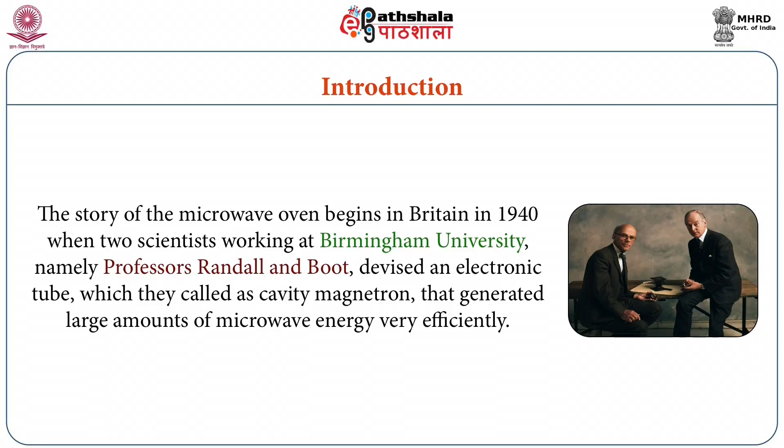The unique ability of the magnetron to transmit microwaves at very high power enabled radar equipment to be built that was much smaller, more powerful, and more accurate than anything previously designed.

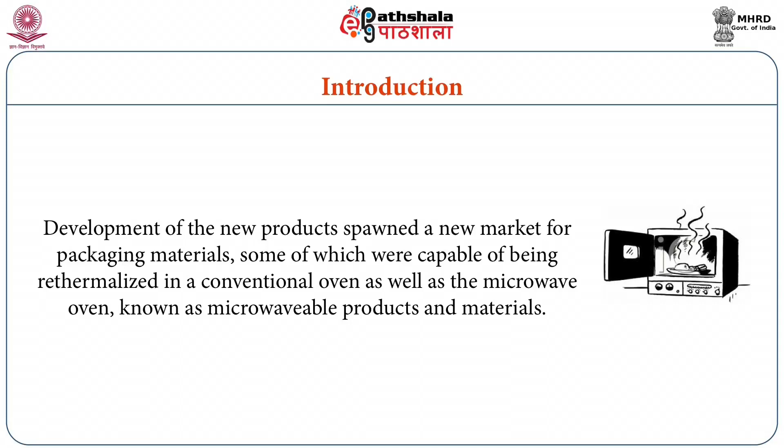In the decade of 1980, there was prolific growth of the consumer microwave oven, resulting in a new category of food products. Development of these new products spawned a new market for packaging materials, some of which were capable of being rethermalized in a conventional oven as well as the microwave oven, known as microwavable products and materials. Still other new products and their packages evolved that were developed strictly for heating in the microwave oven.

The penetration of microwave ovens into US homes and lifestyle grew rapidly, from a mere 15% of households owning a microwave oven in 1980 to an impressive 78% by 1989.

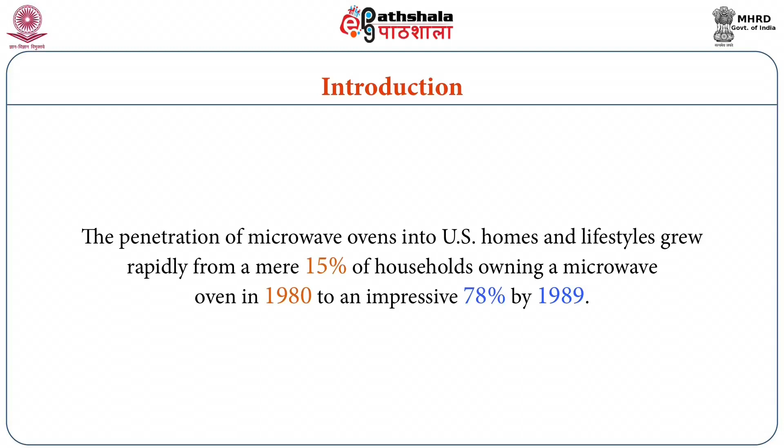The new category was supported by microwave popcorn, a product developed specifically for preparation in the microwave oven. The standard was now set for other new food products attempting to cater to consumers' desires for foods offering quickness and convenience in preparation.

In the mid 1980s, a wave of premium priced frozen dinners was witnessed, positioned as a higher quality TV dinner, now available on thermoset polyester plates capable of being heated in the conventional oven environment or the microwave.

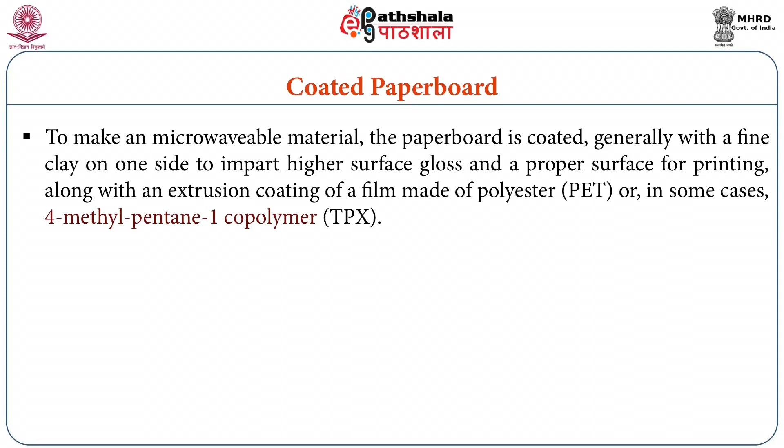To make a microwavable packaging material, the paperboard is generally coated with a fine clay on one side to impart higher surface gloss and a proper surface for printing, along with an extrusion coating of a film made of polyester, or in some cases methylpentene-1 polymer, also called TPX.

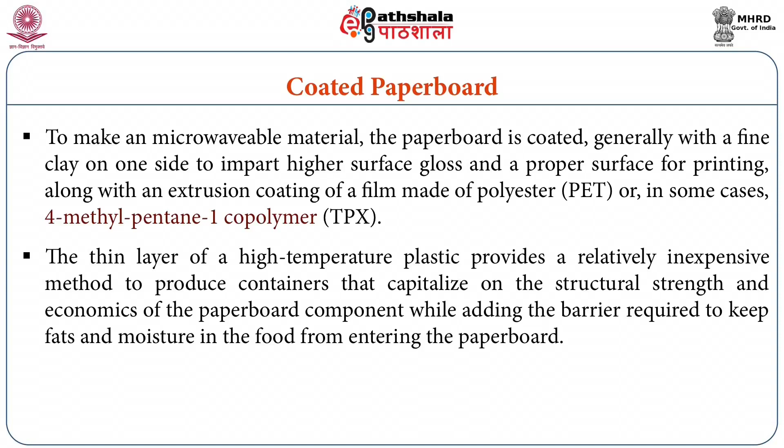This thin layer of high temperature plastic provides a relatively inexpensive method to produce containers that capitalize on the structural strength and economy of the paperboard component, while adding the barrier required to keep fats and moisture in the food from entering the paperboard.

Other plastics are also extrusion coated onto paperboard, notably low density polyethylene and polypropylene. However, the maximum temperature resistance of LDPE is 215 degrees Fahrenheit, and of polypropylene is 260 degrees Fahrenheit.

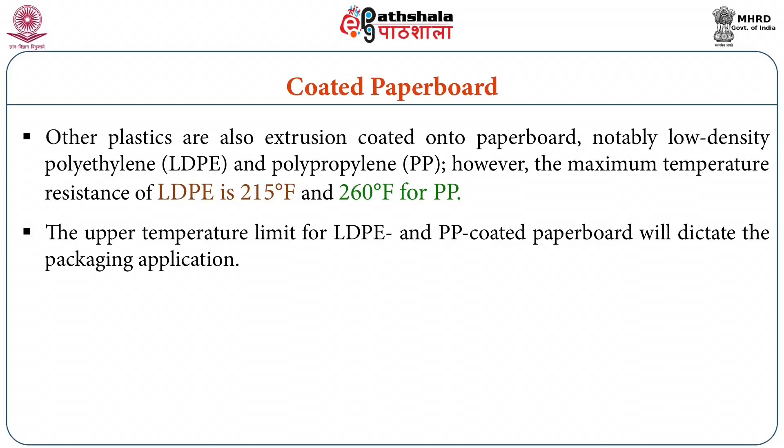The upper temperature limit for LDPE and PP coated paperboard will dictate the packaging application, with a maximum temperature limit of 215 degrees Fahrenheit for LDPE coated paperboard, which provides excellent properties for milk cartons and cold and hot drink cups. However, its use in the microwave oven will be limited to products that will not get hot, such as frozen desserts that may be microwaved only to soften the contents.

Similarly, PP coated paperboard is available for microwave-only packages in which there is no risk that hot spots within the package can reach a temperature where the PP softens, causing structural changes in the package, or the PP to break down, allowing some of its constituents to enter the food.

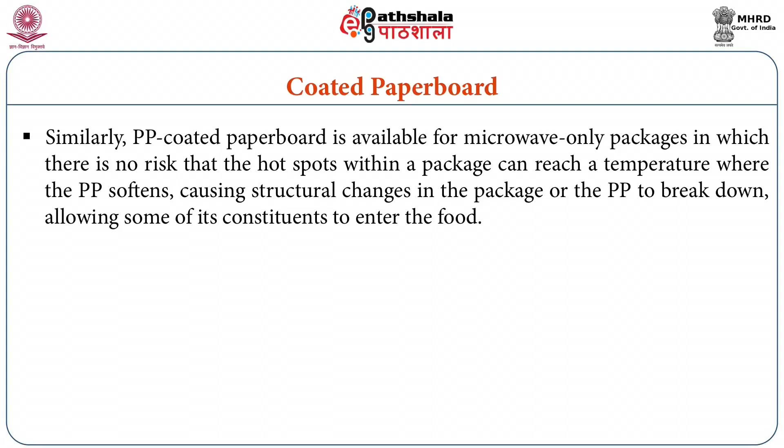The dominant ovenable paperboard is PET extrusion coated. With a maximum temperature use of 400 degrees Fahrenheit, PET coated paperboard is well suited for forming containers used in microwavable packaging for a variety of food products.

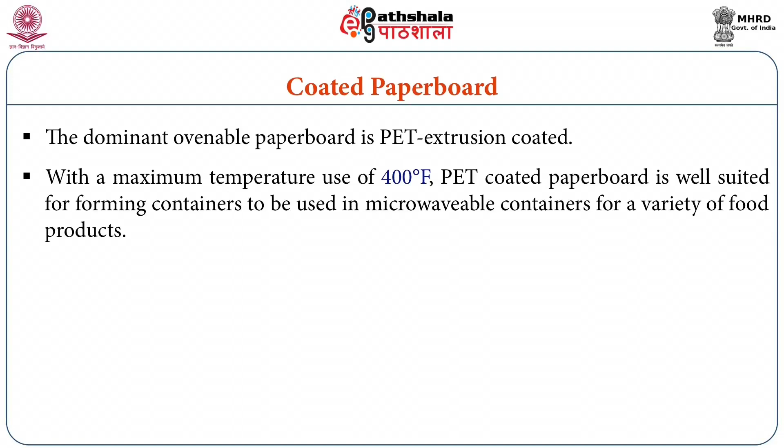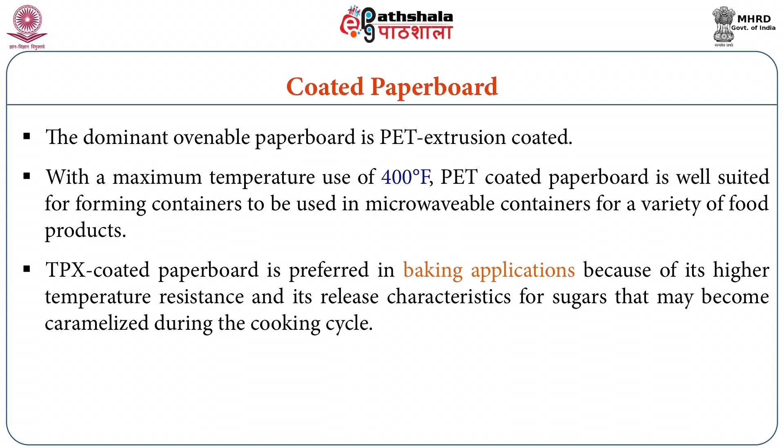TPX coated paperboard is also preferred in baking applications because of its higher temperature resistance and its release characteristics for sugars that may become caramelized during the cooking cycle. TPX coated paperboard is more expensive than PET coated paperboard.

PET film laminated molded pulp trays are cellulose based containers, most commonly seen as plates and trays. The PET film is required to provide barrier resistance to fats and oils, along with the structural characteristics of the lower cost pulp.

The cellulose fibers are suspended in a slurry, which may contain other components such as sizing and treatment to provide better barrier properties, and pumped to the compression molds which form the pulp into the desired container shape.

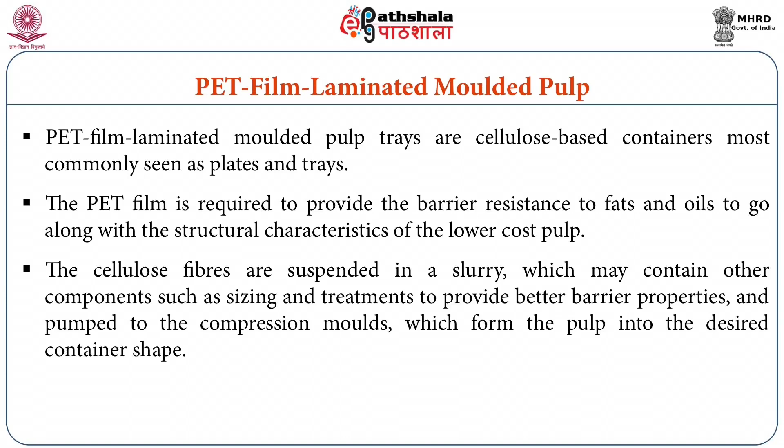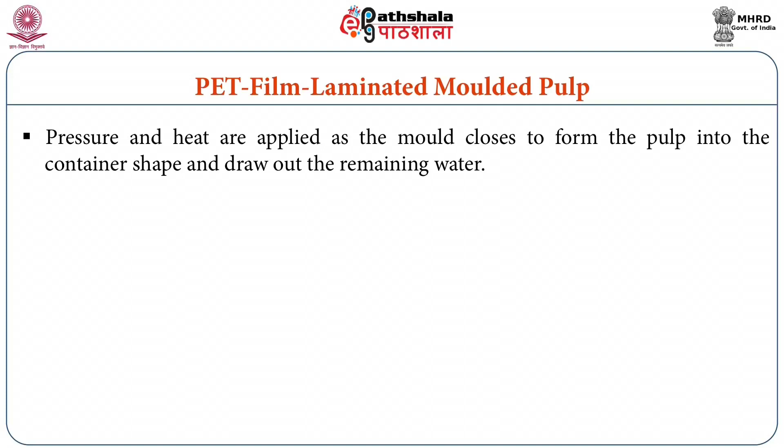The slurry is held into the mold by vacuum, which also draws most of the water out through a screen. Pressure and heat are applied as the mold closes to form the pulp into the container shape and draw out the remaining water. An advantage to this type of molding is the flexibility in the shape of the finished container, which may include divided compartments and areas with varying dimensional thickness for strength.

After the molding cycle, the containers are laminated with a cast PET film, which is then trimmed of any excess and packaged. PET laminated molded pulp trays will withstand oven temperatures of 400 degrees Fahrenheit with good stiffness and structural characteristics. CPET, or crystallized polyethylene terephthalate.

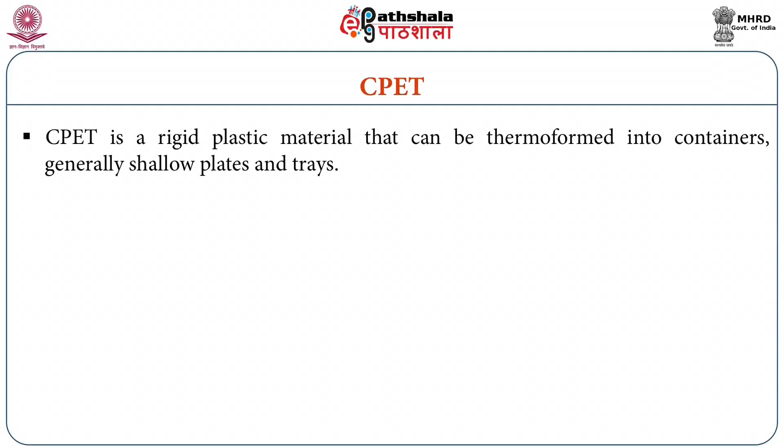It is a rigid plastic material that can be thermoformed into containers, generally shallow plates and trays. To become microwavable, the PET must be crystallized during the thermoforming process. PET contains nucleating agents that assist in the molecular crystallization.

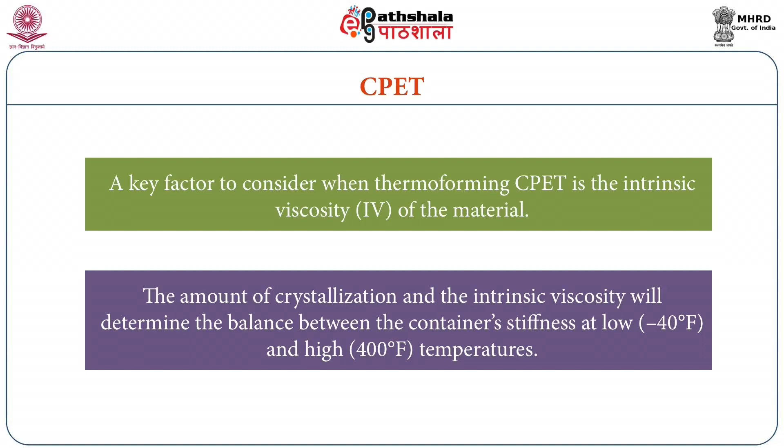A key factor to consider when thermoforming CPET is the intrinsic viscosity of the material. The amount of crystallization and the intrinsic viscosity will determine the balance between the container stiffness at low and high temperatures. Generally, the crystallinity of the finished container will be 28 to 32%, and the intrinsic viscosity will range from 0.8 to 0.95.

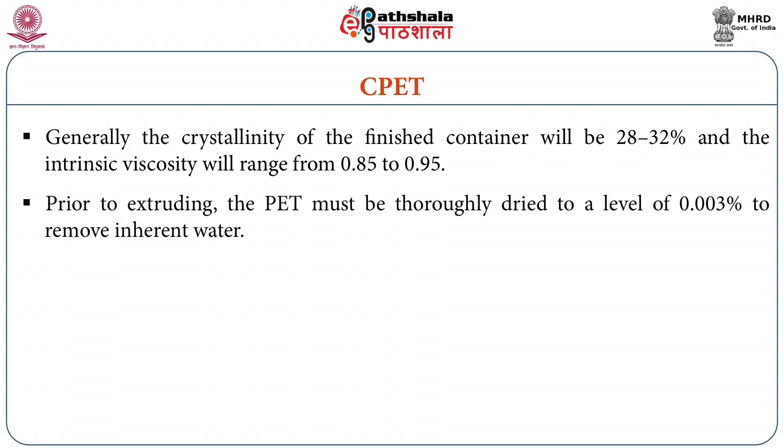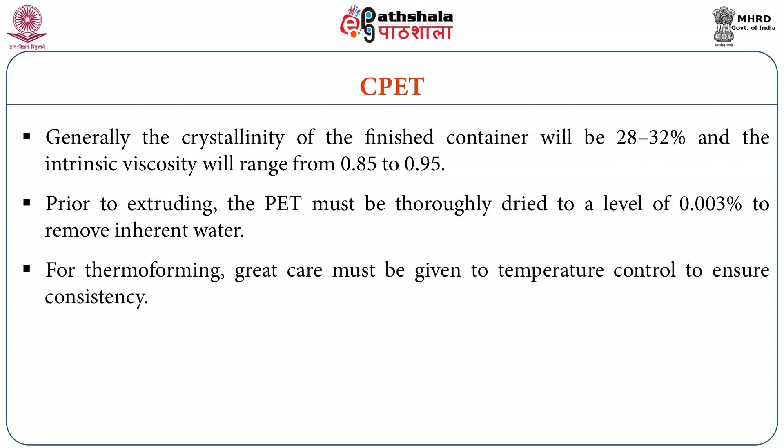Prior to extruding, PET must be thoroughly dried to a level of 0.003% to remove inherent water. For thermoforming, great care must be given to temperature control to ensure consistency. The ovens used to heat the sheet on the thermoformer prior to forming must heat the sheet evenly across the dimensions.

CPET is considered to be a difficult material to work with because of its toughness and narrow range of operating temperatures, so proper mold design is a consideration. Generally, aluminum molds are used to promote even thermal conductivity during forming.

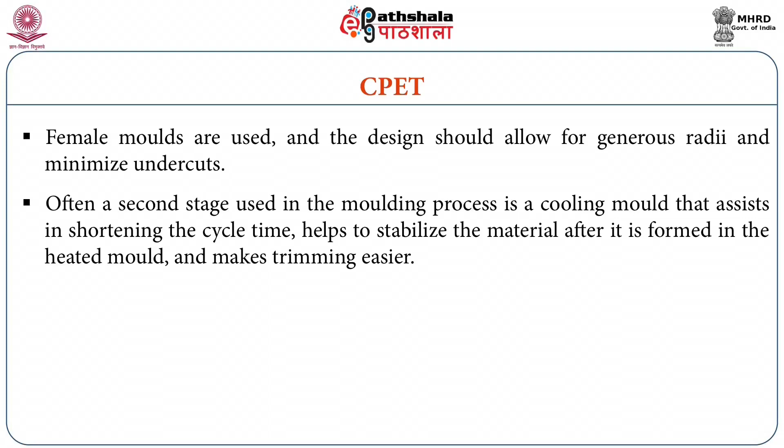Often a second stage is used in the molding process, a cooling mold that assists in shortening the cycle time, which helps to stabilize the material after it is formed in the heated mold and makes trimming easier.

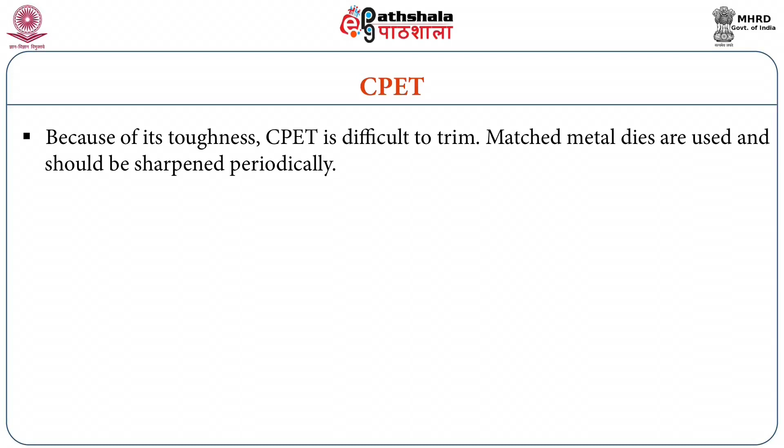Because of its toughness, CPET is difficult to trim. Matched metal dies are used and should be sharpened periodically. Additionally, heavy duty trim presses with quick cycle times should be used.

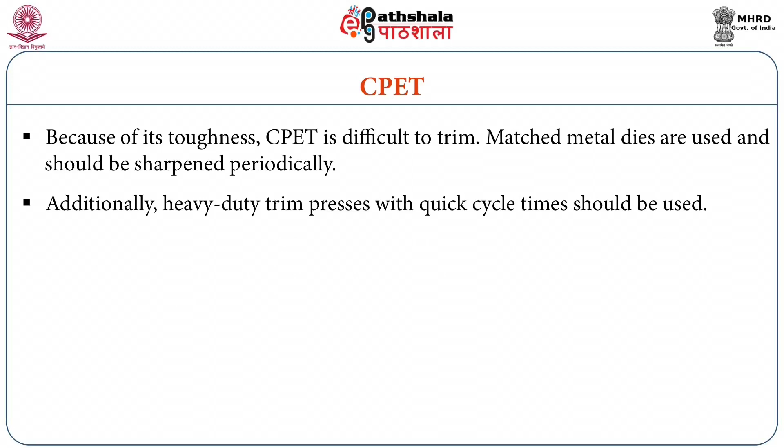CPET has a temperature resistance of 400 degrees Fahrenheit, also has a high gloss, has a hard surface, and can be colored with pigment effectively, although the preferred colors in the market are black, white, and ivory.

PCTA, polymer of cyclohexane dimethanol and terephthalic acid. PCTA is another material in the polyester family that has higher temperature resistance properties than CPET and is a copolyester resin composed of PCTA, which is often referred to by Eastman company's trade name Thermx.

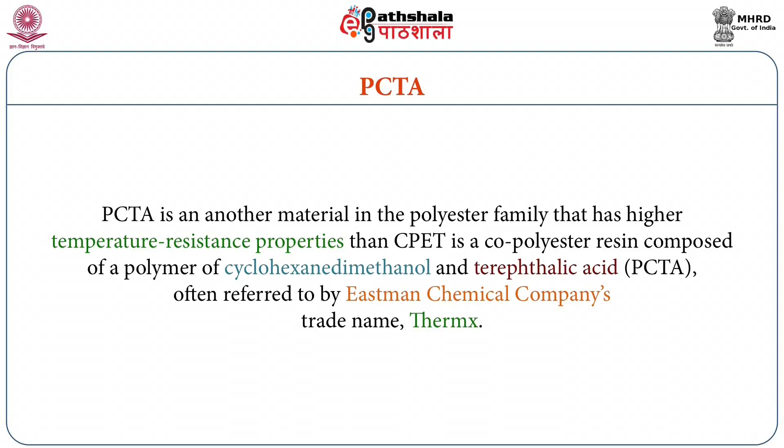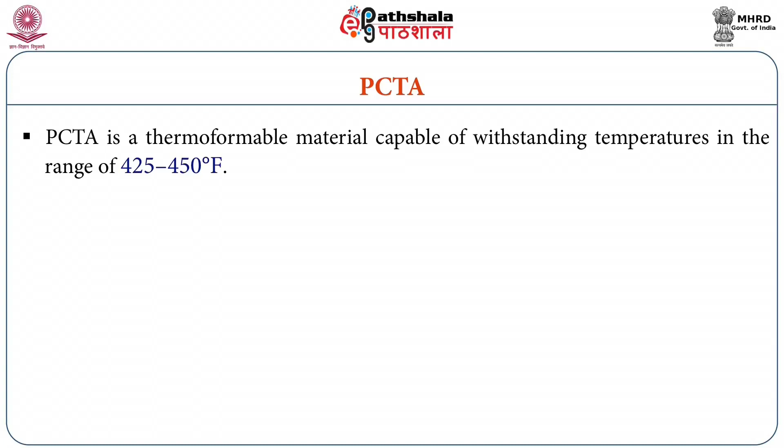PCTA is a thermoformable material capable of withstanding a temperature range between 425 to 450 degrees Fahrenheit, and processing is generally considered to be more difficult than CPET because of the higher temperatures required for extrusion and thermoforming and greater cooling requirements.

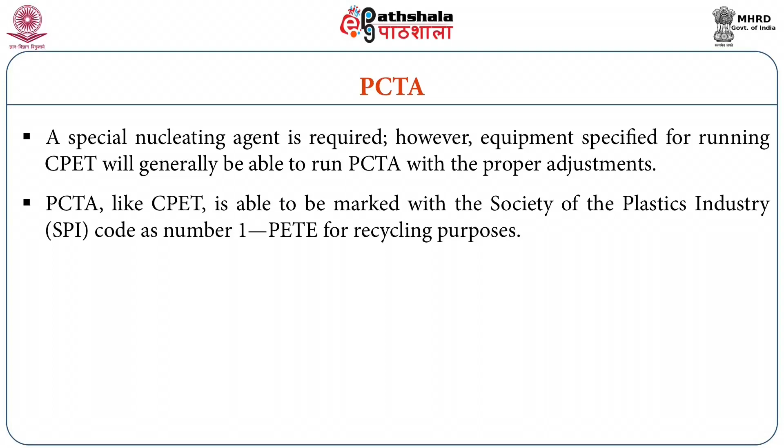A special nucleating agent is required. However, equipment specified for running CPET will generally be able to run PCTA with the proper adjustments. PCTA, like CPET, is able to be marked with the Society of the Plastics Industry code as number 1 PETE for recycling purposes. Formed CPET.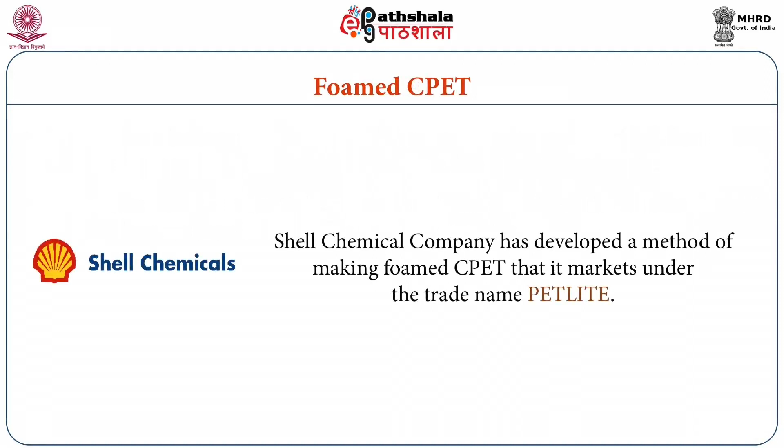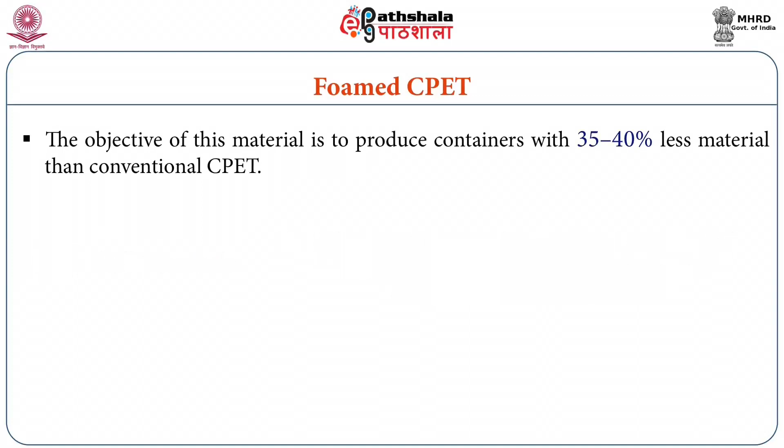Shell Chemical Company has developed a method of making foamed CPET that it markets under the trade name PETLite. The objective of this material is to produce containers with 35 to 40% less material than conventional CPET.

Extrusion equipment used for CPET must be modified for running foamed CPET. However, a single screw extruder can also be used. The blowing agent used for the expansion is an inert gas.

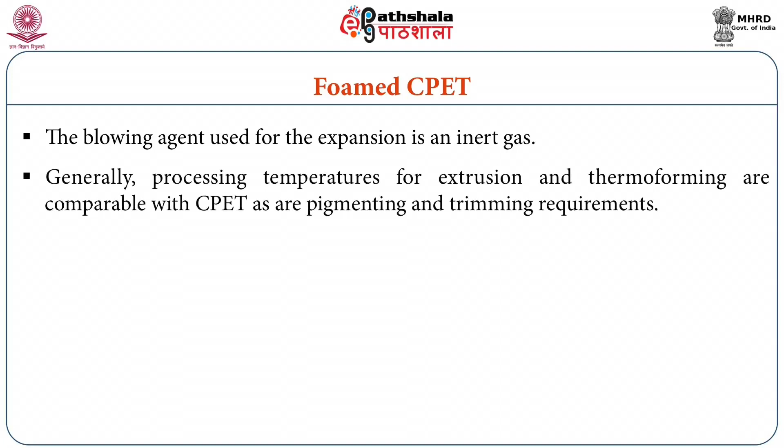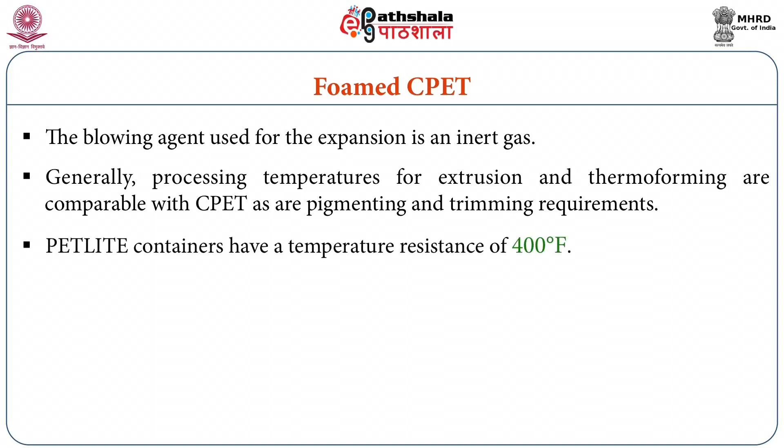Generally, processing temperatures for extrusion and thermoforming are comparable with CPET, as are pigmenting and trimming requirements. PETLite containers have a temperature resistance of 400 degrees Fahrenheit, and currently commercial applications include containers for baked goods such as muffins and cakes. Thermoset polyester.

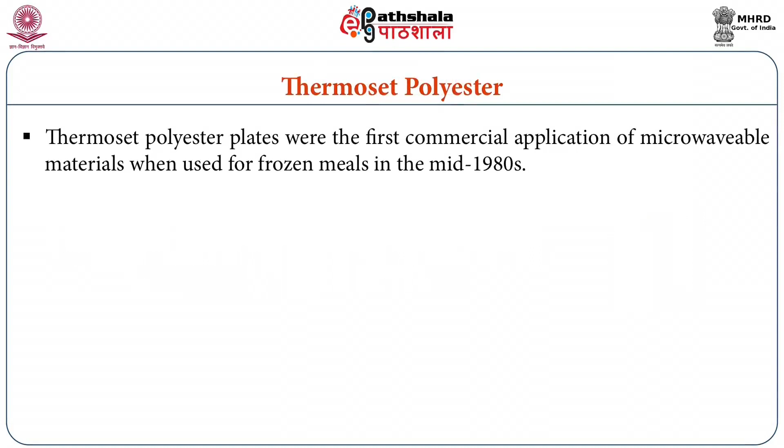Thermoset polyester plates were the first commercial application of microwavable materials, used for frozen meals in the mid 1980s. The compound used is an unsaturated polyester highly filled with minerals such as talc and calcium carbonate, along with glass fibers and catalyst materials to produce the chemical reaction that converts the compound into an irreversibly set material. The polyester compound is mixed and extruded to form logs that are cut to the proper size and weight for the finished container.

The material is placed into a heated mold in a hydraulic press that closes the mold. The pressure causes the material to flow into the shape of the mold, and the heat cures the compound while under pressure into the finished and irreversible material.

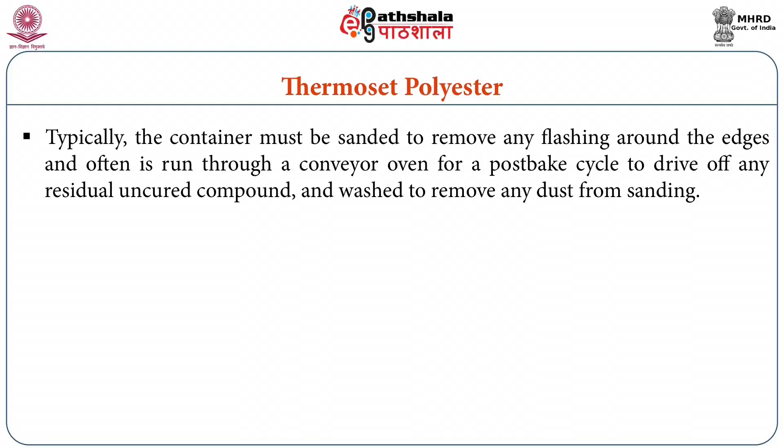Typically, the container must be sanded to remove any flashing around the edges, and is often run through a conveyor oven for a post-bake cycle to drive off any residual uncured compound, then washed to remove dust from sanding. The process produces containers that are very strong and stiff even at high temperatures of 425 Fahrenheit, and are heavy with a china-like feel and appearance.

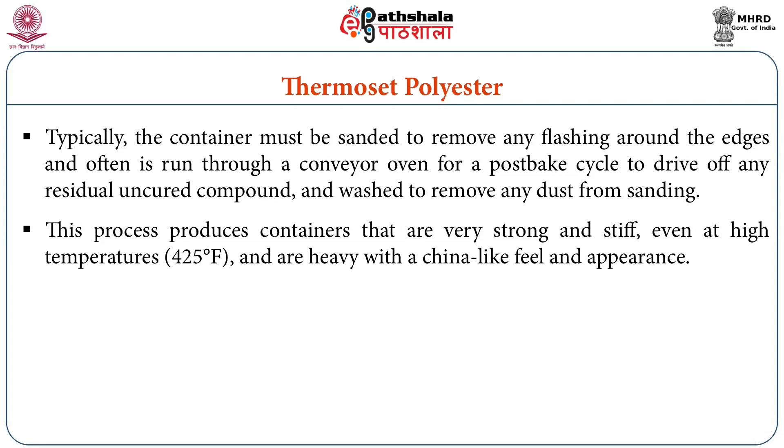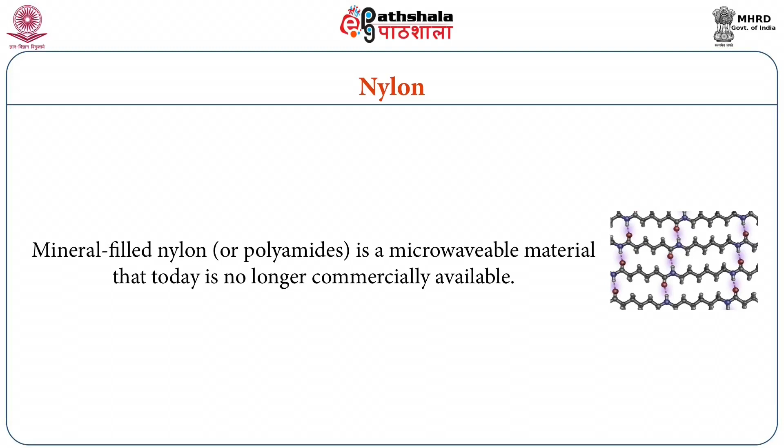Nylon. Mineral-filled nylon, or polyamide, is a microwavable material that today is no longer commercially available. It was developed by DuPont Canada during the mid 1980s and is converted by injection molding into containers.

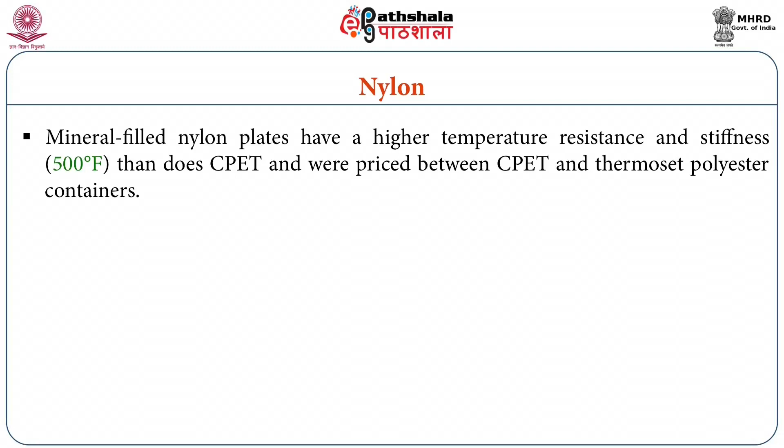Mineral filled nylon plates have higher temperature resistance and stiffness, up to 500 Fahrenheit, which is higher than CPET, and were priced between CPET and thermoset polyester containers. Although the material was successfully introduced commercially, its use was limited because of higher cost than CPET and also the hygroscopic nature of filled nylon plates, which sometimes caused performance problems in the microwave oven.

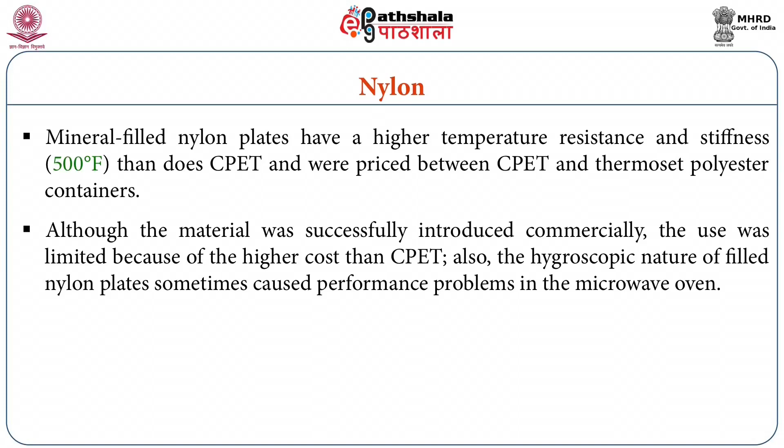Nylon has good resistance to oils and fats. However, within the moist operating environment of the microwave oven, some of the water present in the food would be absorbed into the nylon plate, resulting in a loss of dimensional stability.

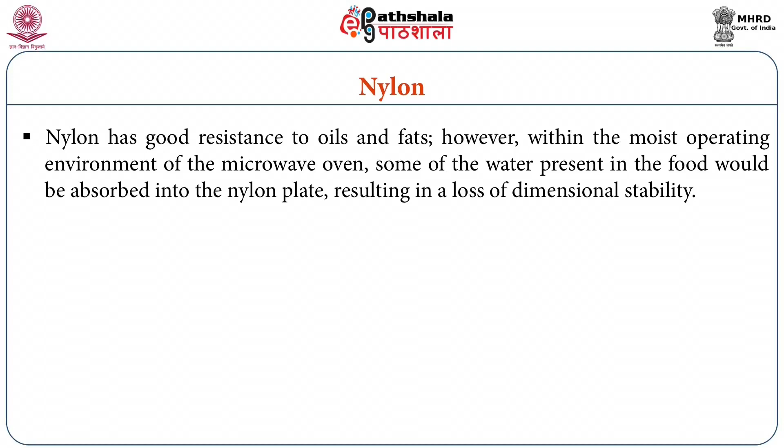Nylon plate strength was notable in the conventional oven, where unlike some competitive thermoplastic materials, it retained its rigidity. Nylon plates were injection molded, a process that generally has higher tooling costs and higher operating costs compared with thermoforming at comparable unit volumes.

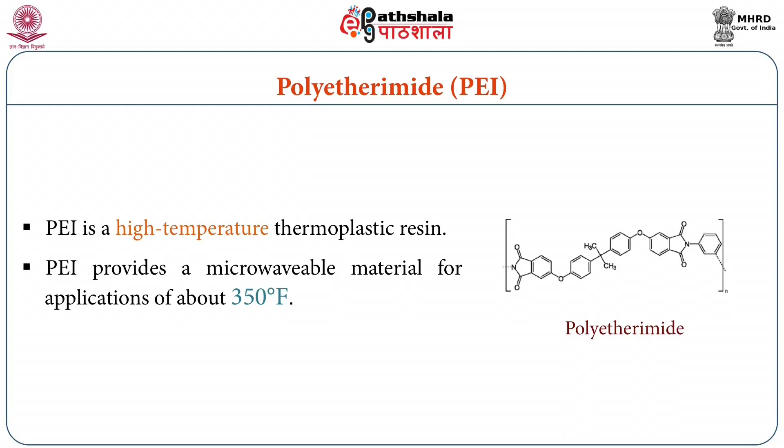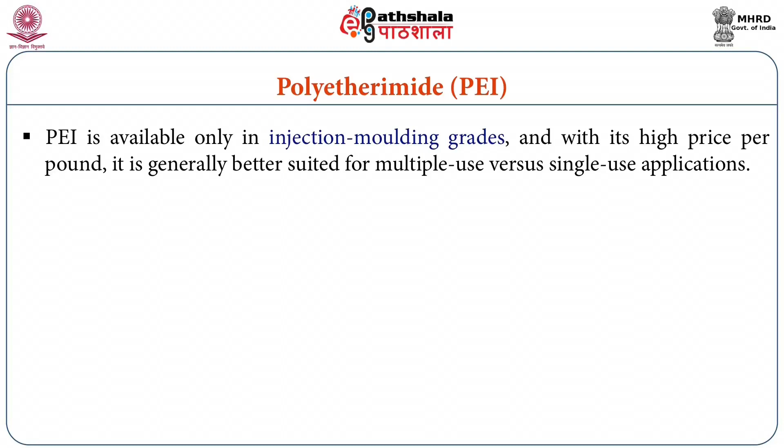Polyetherimide is a high temperature thermoplastic resin which provides a microwavable material for applications of about 350 Fahrenheit. It is available only in injection molding grades, and with its high price per pound, it is generally better suited for multiple use versus single use applications.

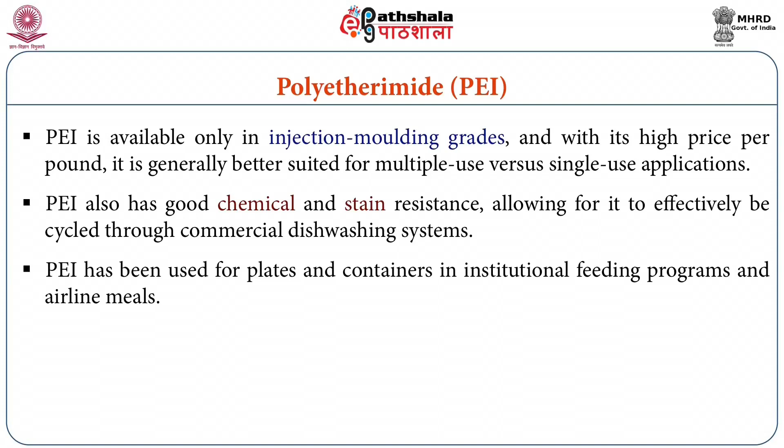It also has good chemical and stain resistance, allowing it to effectively be cycled through commercial dishwashing systems. Polyetherimide has been used for plates and containers in institutional feeding programs and airline meals.

Polysulfones are amorphous thermoplastics which can withstand a temperature of 325 Fahrenheit and can be used for microwave purposes. But nowadays it is used for multiple-use applications because of its higher cost. That's why single use is not possible.

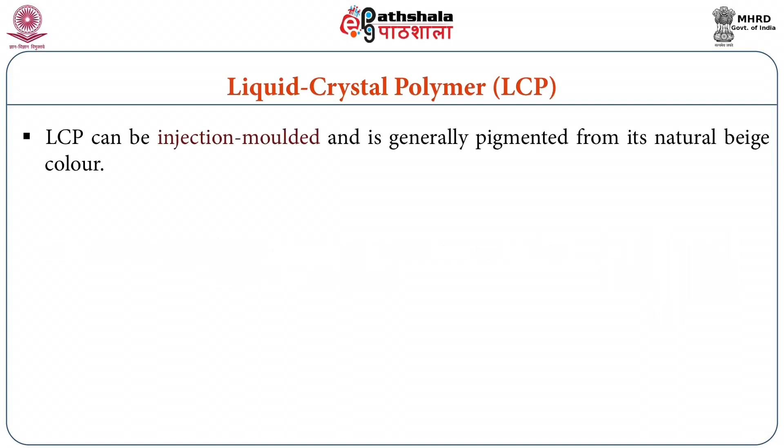Liquid crystal polymer. Liquid crystal polymers offer very good high temperature resistance of up to 500 Fahrenheit in some grades. They can be injection molded and are generally pigmented from their natural beige color. They are transparent to microwave energy. However, the high price of this resin limits its use to specialized applications.

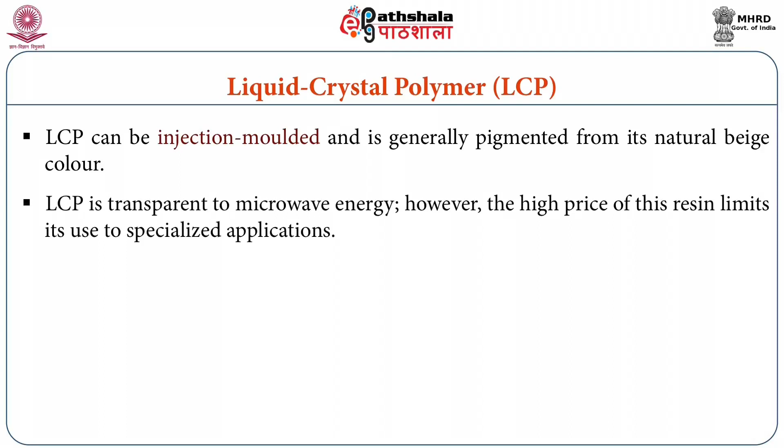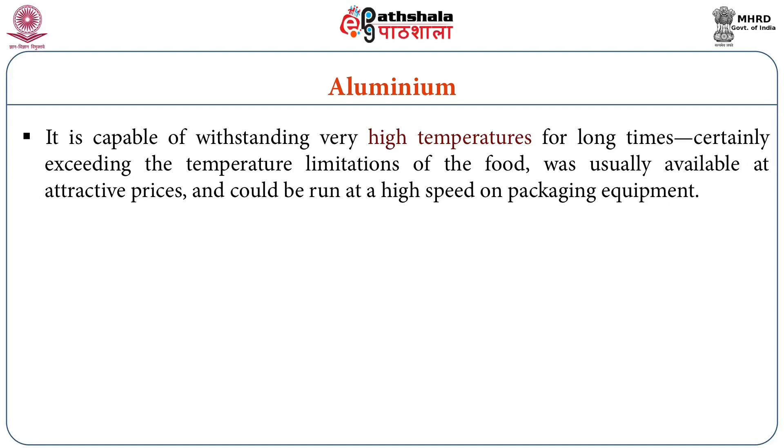Aluminium is capable of withstanding very high temperatures for long times, certainly exceeding the temperature limitations of the food, which was usually available at attractive prices, and could be run at high speed on packaging equipment.

During the early stages of the microwave oven, arcing occurred when metal objects were placed in the oven cavity during operation, sometimes even disabling the unit. This was largely corrected when the electronics were improved so that the energy could not be reflected back into the magnetron.

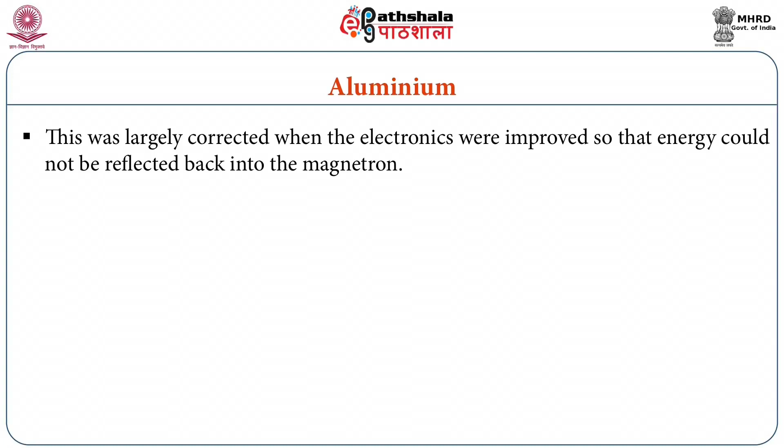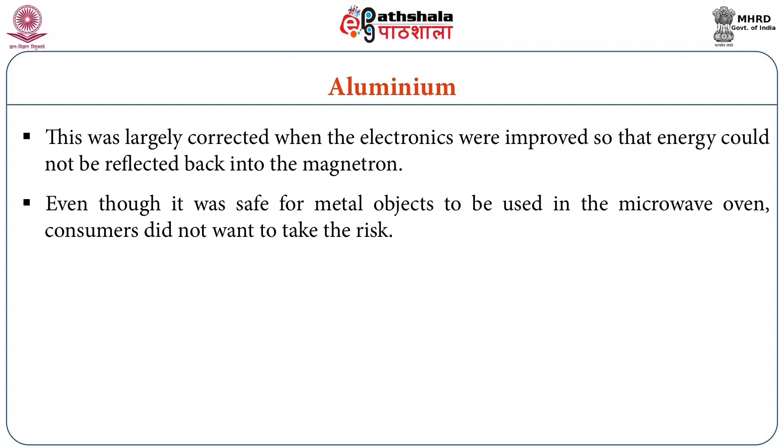Even though it was safe for metal objects to be used in the microwave oven, consumers didn't want to take the risk. In the mid 80s, Alcoa developed a plastic coated aluminum tray that was formed without the typical wrinkled corners. The vinyl epoxy coating was often pigmented to appear more like plastic and allowed the tray to work in both conventional and microwave ovens.

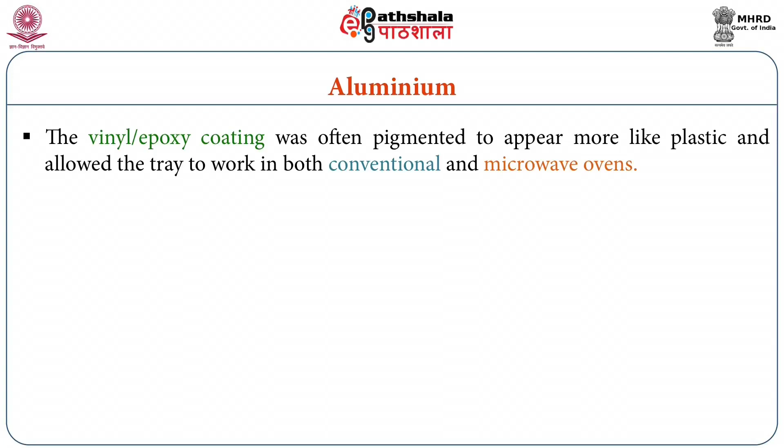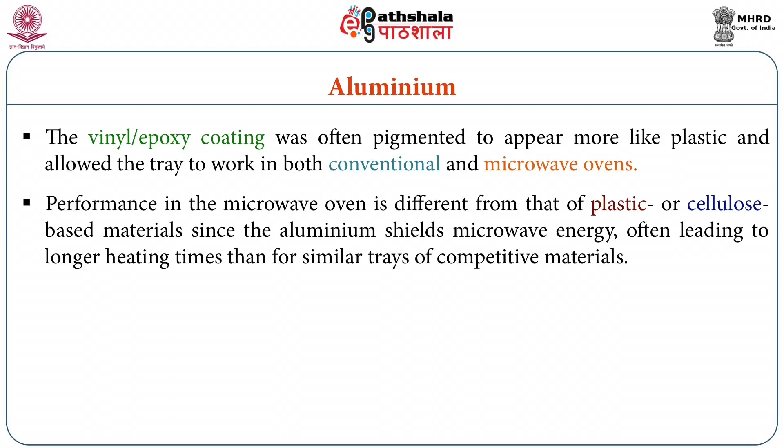Performance in the microwave oven is different from that of plastic or cellulose based materials, since the aluminum shields microwave energy, often leading to longer heating times than similar trays of competitive materials. This lends the design of the tray shape to be shallow, to lessen the amount of microwave energy shielded, and coated aluminum foil trays were used commercially for pot pies where they were able to maintain high filling line speeds.

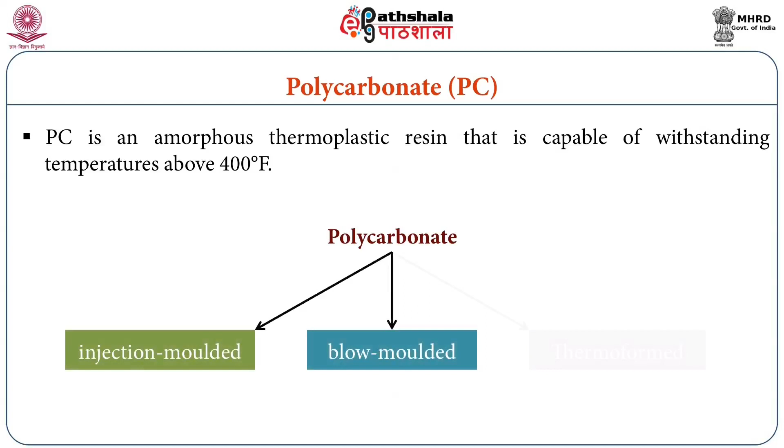Polycarbonate. Polycarbonate is an amorphous thermoplastic resin capable of withstanding temperatures above 400 degrees Fahrenheit. It can be injection molded, blow molded, and thermoformed. Polycarbonate has been used in applications for multiple use products such as microwavable cookware, and it is virtually unbreakable, making it a good replacement for glass.

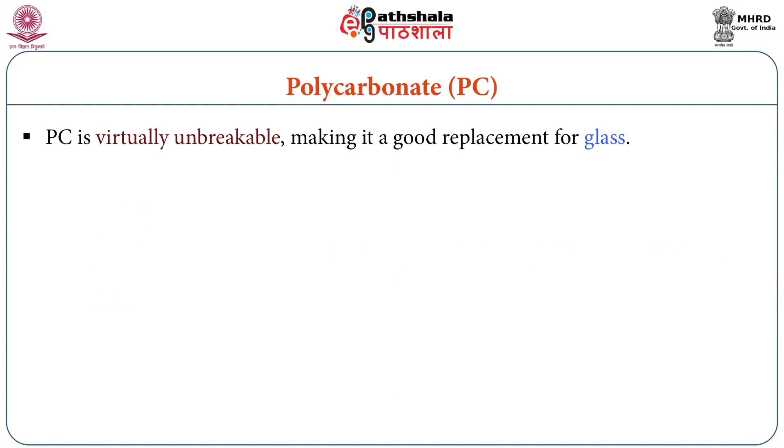It was used in commercial packaging during the late 1980s for microwavable meals. The structure used was thermoformed from a 3-layer co-extruded sheet. However, because of its high price per pound, it was replaced by competitive materials that offered acceptable performance for a much lower cost.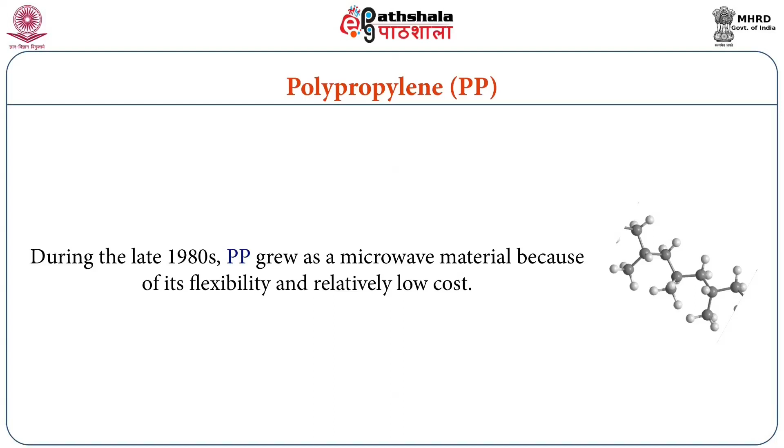Polypropylene. During the late 1980s, polypropylene grew as a microwave material because of its flexibility and relatively low cost. Polypropylene use in packaging was bolstered by the rapid growth of shelf-stable meals in which ethylene vinyl alcohol is used to improve the oxygen barrier properties required to safely preserve the cooked food at ambient temperatures.

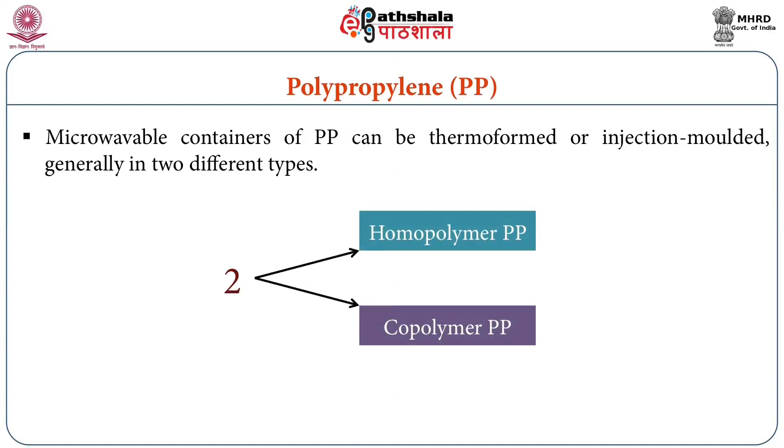Microwavable containers of PP can be thermoformed or injection molded, generally in two different types: homopolymer PP and random copolymer PP. Homopolymer PP is produced using propylene monomer without the addition of other monomers. Random copolymer PP is similar in polymeric structure to homopolymer PP, but also includes the random addition of ethylene to a polypropylene chain as it grows.

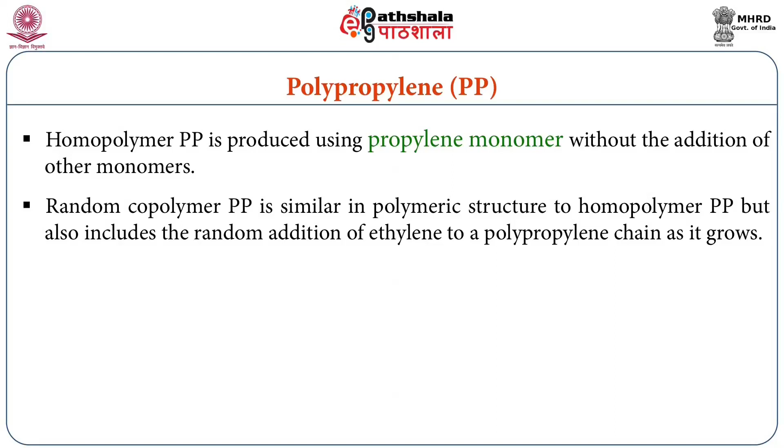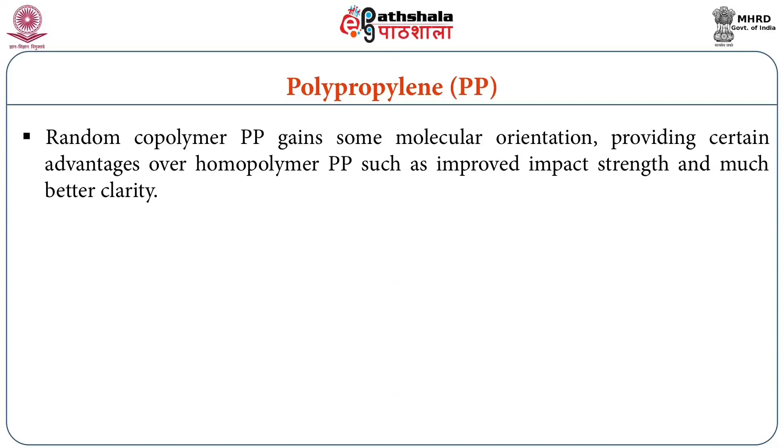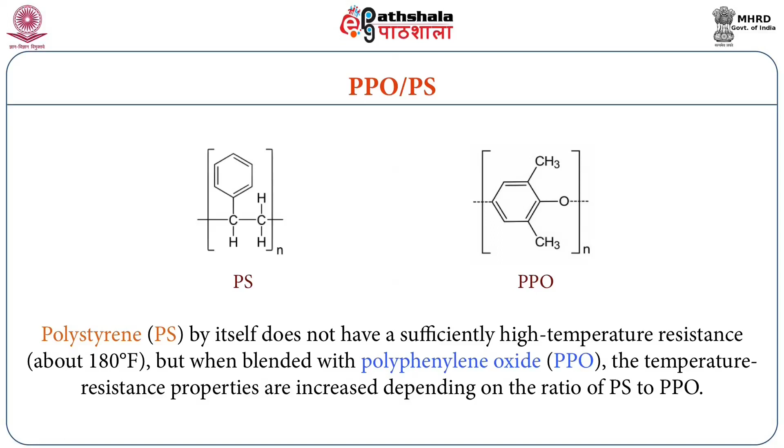Polystyrene by itself does not have a sufficiently high temperature resistance, but when blended with polyphenylene oxide, the temperature resistance properties are increased depending on the ratio of polystyrene and polyphenylene oxide. For temperature resistance in the range of 212 to 230 degrees Fahrenheit, a blend of 25% PPO and 75% PS is recommended. PPO has a low resin flow and is therefore difficult to form.

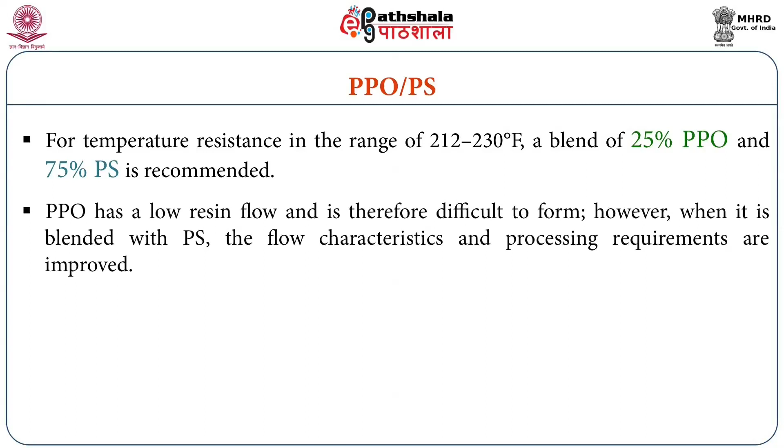However, when it is blended with PS, the flow characteristics and processing requirements are improved. PPO-PS can be thermoformed on equipment used for PS forming with only minor modifications. It is important to have accurate blending during the extrusion process, therefore a high intensity mixing screw is required.

Additionally, PPO-PS is able to be foamed by extruding with tandem extruder systems and blowing agents used for polystyrene, such as pentane.

HDPE. HDPE is an acceptable thermoplastic resin for some microwave applications. HDPE starts to lose its rigidity at temperatures above 200 degrees Fahrenheit, resulting in distortion of the tray or container. So care must be taken in selecting this material for food products that will not exceed this temperature.

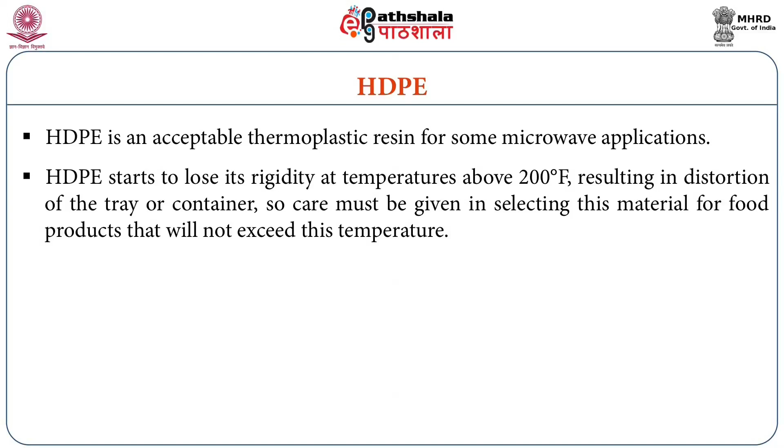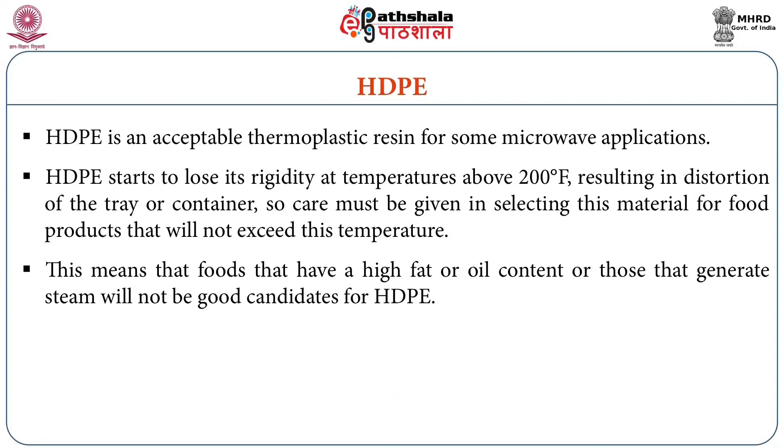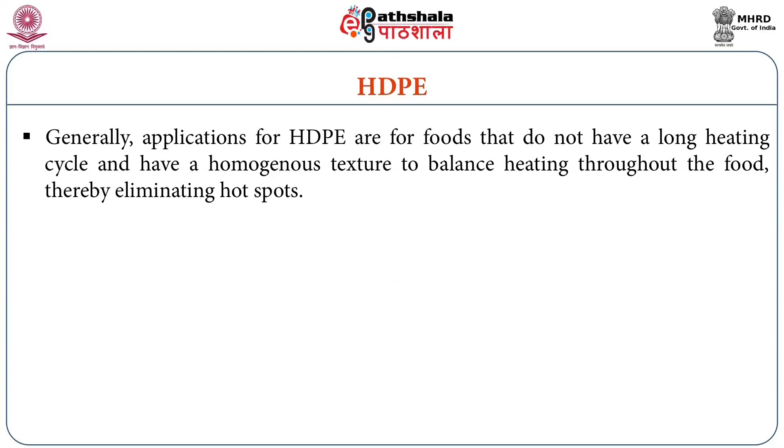This means that foods that have a high fat or oil content, or those that generate steam, will not be good candidates for HDPE. Generally, applications for HDPE are for foods that do not have a long heating cycle and have a homogeneous texture to balance heating throughout the food, thereby eliminating hot spots.

The advantages of HDPE are relatively low cost in comparison with other resins, good processing, and good impact properties at frozen temperatures. HDPE for food trays is most commonly thermoformed but can also be injection molded.

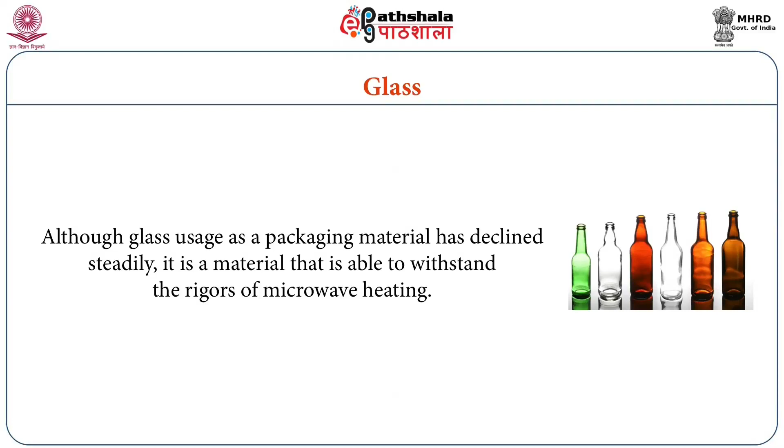Glass. Although the usage of glass as a packaging material has declined steadily, it is a material that is able to withstand the rigors of microwave heating. Because of the advantages plastic has over glass in consumer safety, transportation cost, and design flexibility, there are very few applications where glass is selected as a packaging material because of its ability to be used in microwave.

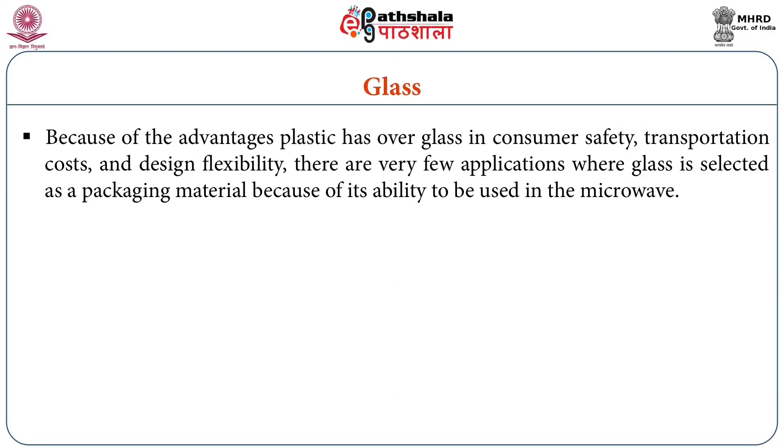So friends, in this module we have discussed different packaging materials which can withstand microwave treatment and can be used for microwavable and irradiated foods.